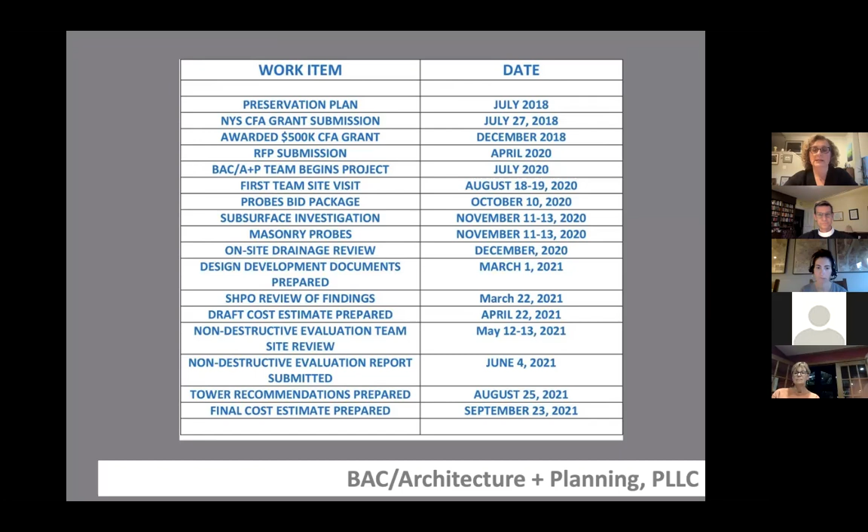Then we prepared our first cost estimate, and everybody took a deep breath. We did some additional evaluation called non-destructive evaluation in May. From May through now, we've been evaluating the findings of that last testing, and we revised the cost estimate. We just finished the revised cost estimate, and now we are just in time for this meeting, ready to make the recommendations on how to proceed with the project.

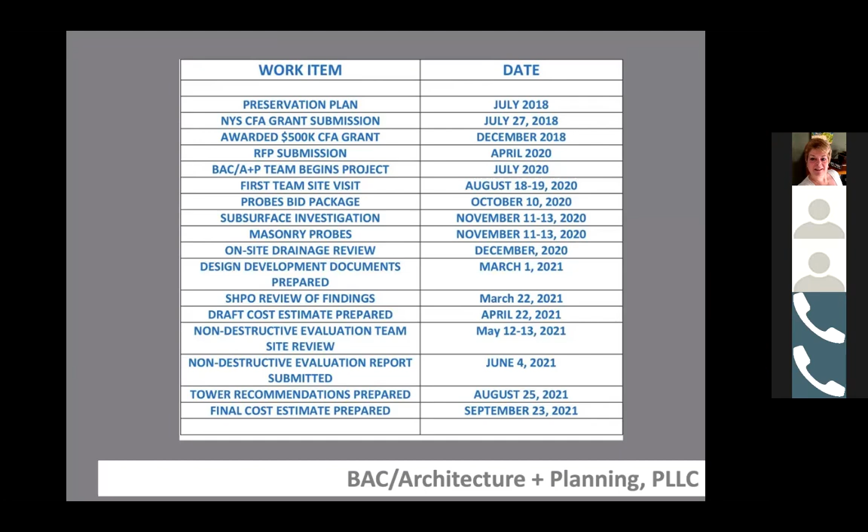So you might ask, why did you have to do this so many times? This was really sort of what I call a reconnaissance survey, where we walked around and looked at everything and identified what we could see without doing any additional testing or probes or opening things up, because at the time, the church did not have that sort of a budget. Our plan was to identify enough of the issues so we could prepare this plan and attach it to the grant application, and hopefully, and we got the grant for $500,000, we could then pursue the actual project and what needed to be done.

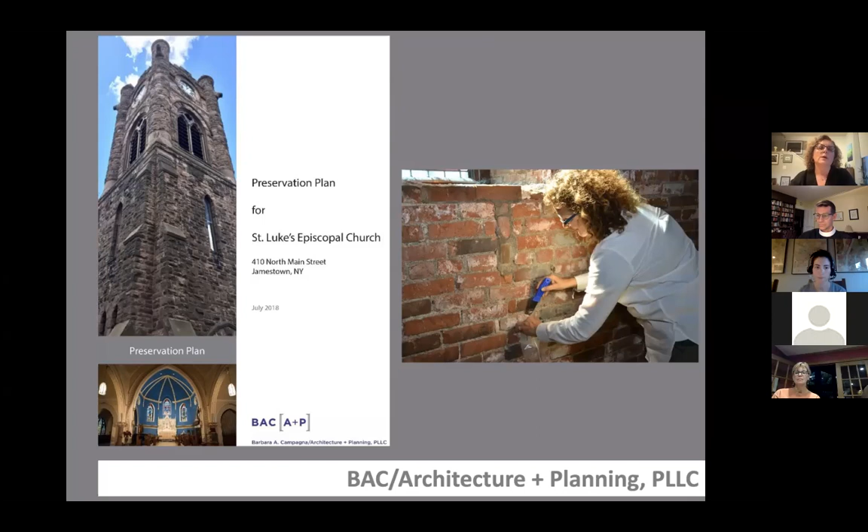A few things we were able to do: we took a variety of mortar samples, shown in this photo to the right. We sent mortar and some sandstone, the building is what's called Medina sandstone, and a couple of bricks to be tested, so we understood the composition of all the materials in the building.

So we got together in July and August. Here's most of our team in August. We came out, spent 2 very intense days comparing the church to the existing conditions drawings, marking them up. It's really important that our team gets to work together. For example, I'm the architect, and here's my associate architect. Here's Jenna, the structural engineer, and here's Helen, our conservator. And here's Joanne, who does our marketing and takes all of our photos for social media and helps with the business management. We spent all this time together, looking at the building from these different eyes and different views.

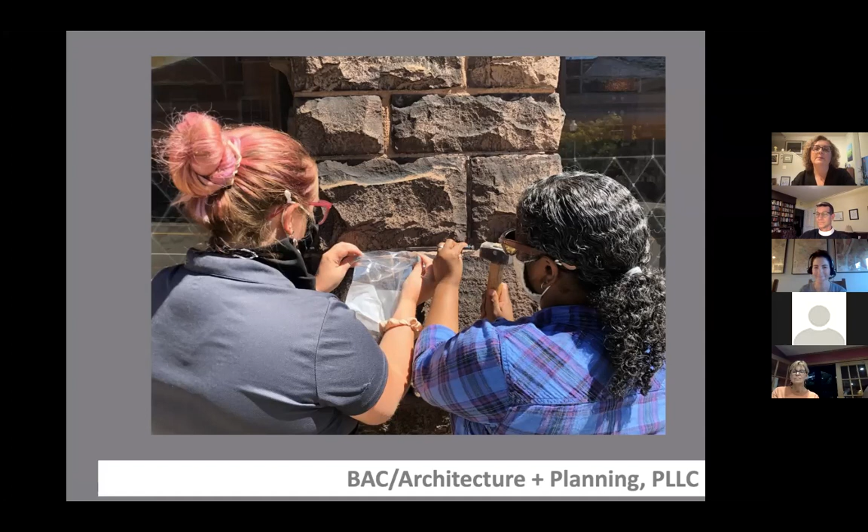Here's some additional samples we took for more intense conservation testing during that time. This is Justina and Helen taking some more samples. Mortar is very complicated because you have what's called a setting bed and a pointing bed, so it's often 2 different types of mortar within one line of mortar. So it's important to understand where's the original mortar. What's interesting about this building is there are probably about 7 different types of mortar that have been put on the building over the past 100 years.

So what we found in the preservation plan, what we observed, was that the front porch seemed to be pulling away from the building. If you've tried to walk up these stairs, you know there are issues getting up the stairs, that they've been pulling away. The ramp has a variety of issues.

Our observation in 2018 was that we needed to understand why the front porch was settling, and we needed a better understanding of why so much water was infiltrating throughout the bell tower.

So when we were together in August, we all decided we needed to pursue a subsurface investigation, meaning digging down below the church to understand what kind of soil it's on and whether there's any water underneath, because we didn't quite understand why it was sinking or settling, or if it was actually settling.

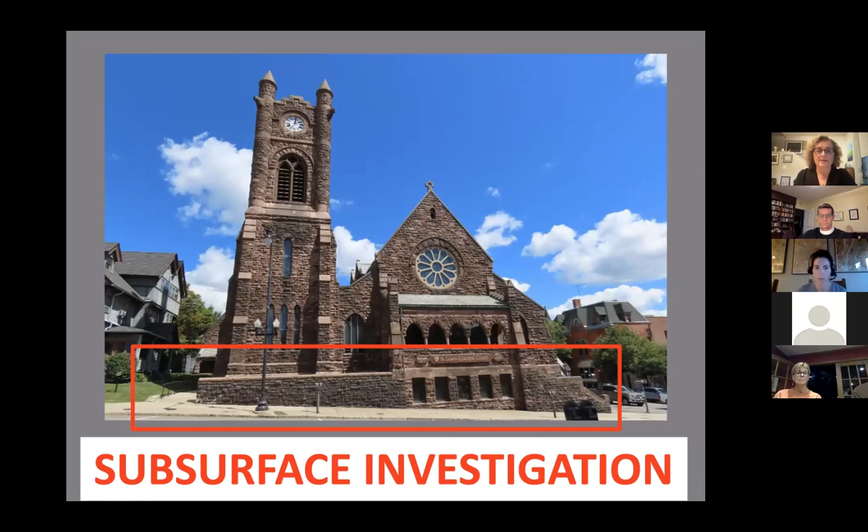Since this is a government project, we had to put this package out to bid, which added some time we weren't originally expecting. We had to hire a firm to come in to drill and do the subsurface investigation, and also to do some masonry probes for us.

Jenna, if you want to say anything about the subs—you know what, I'll just show these few photos and then I'll ask you to say a little bit about what the findings were, if you would like.

So we got these big machines out to do drilling, to drill down. We went about 50 feet in 3 different locations to confirm what kind of soil the church was sitting on. As you know, we're at the corner of two hills, so it's pretty complicated to understand how the building is actually put together, and how it has been sitting here, mostly in pretty good shape, for over 100 years.

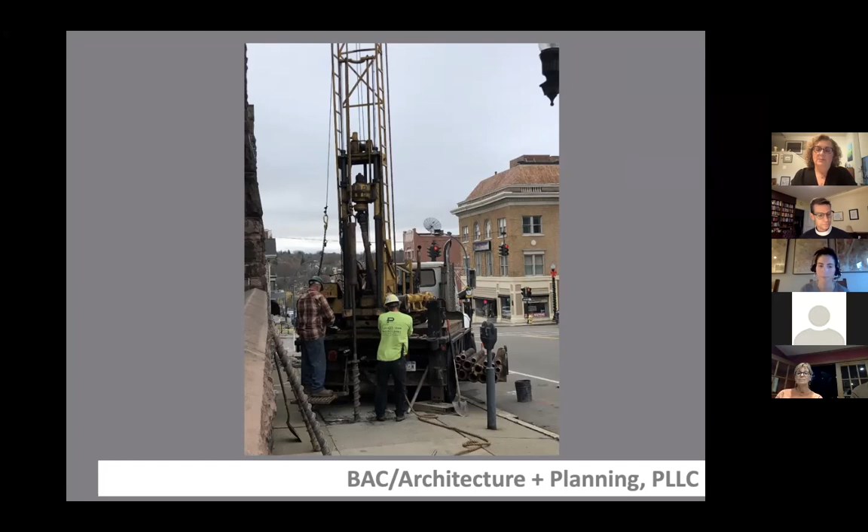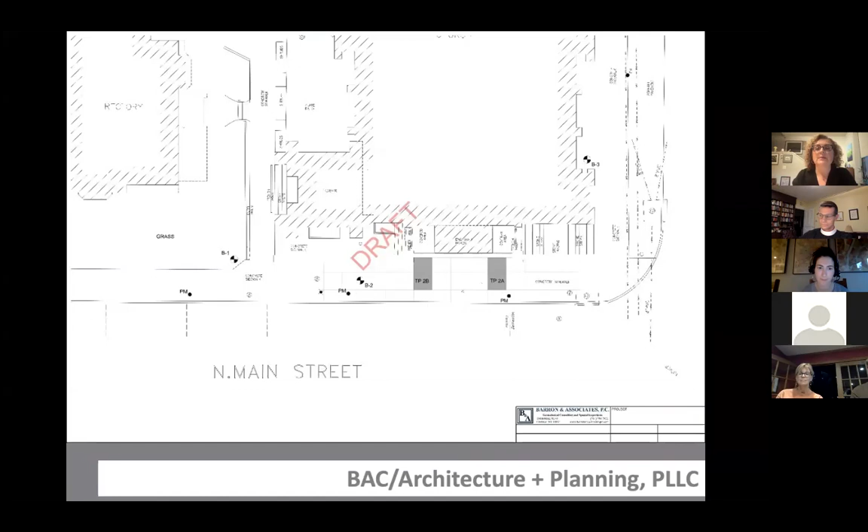So we drilled three different holes down about 50 feet and took soil samples. We also did test pits so we could take a close look at the foundation, see what's going on with it and what it's built of. Jenna's colleague Ed was here during this visit, got down into the test pit, and did all kinds of sketches. This shows what we found, what they took out when they did the drilling.

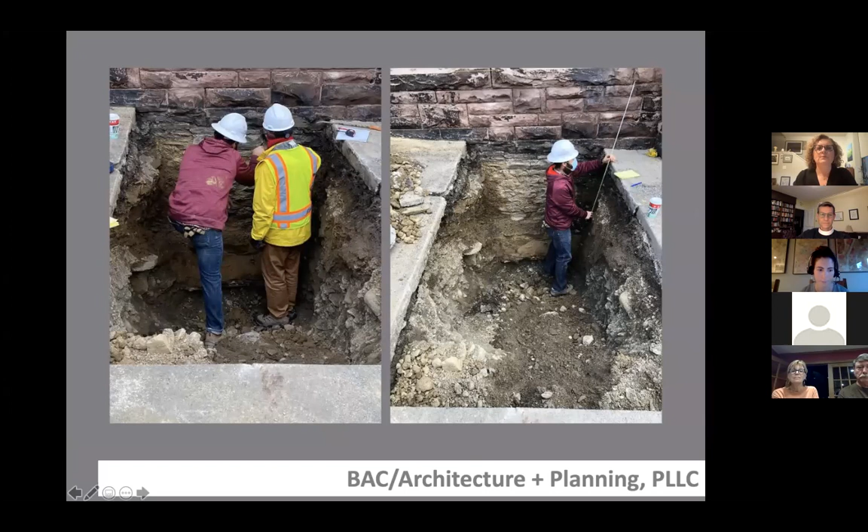And here's Ed and our geotechnical engineer evaluating the foundation. This is sort of MacGyvered.

The good thing about the subsurface investigation was that there was no water down there. We didn't know if there was a river or creek underneath here, but there was no water, which was a very good thing.

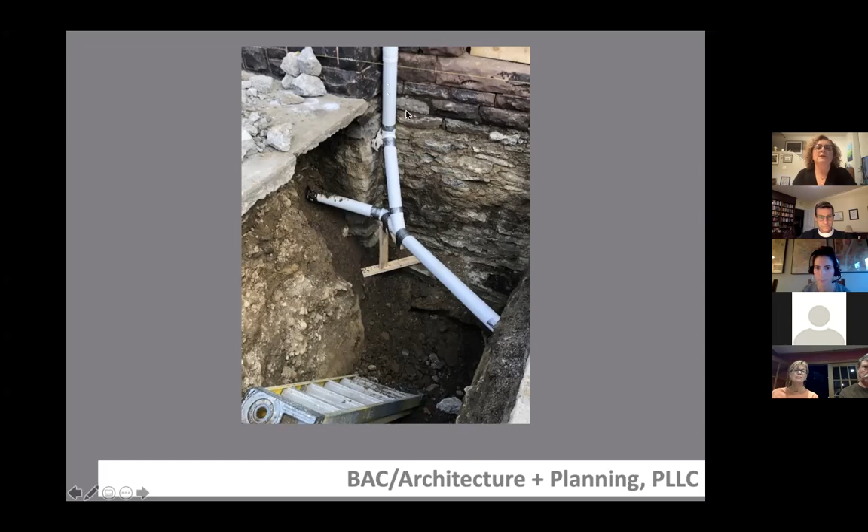The only water was because some drains coming off the building had broken, and our masonry contractor quickly pulled something together. It's not very pretty, so you can still see this white tube when you walk down the street. When we do the construction project next year, that will be changed.

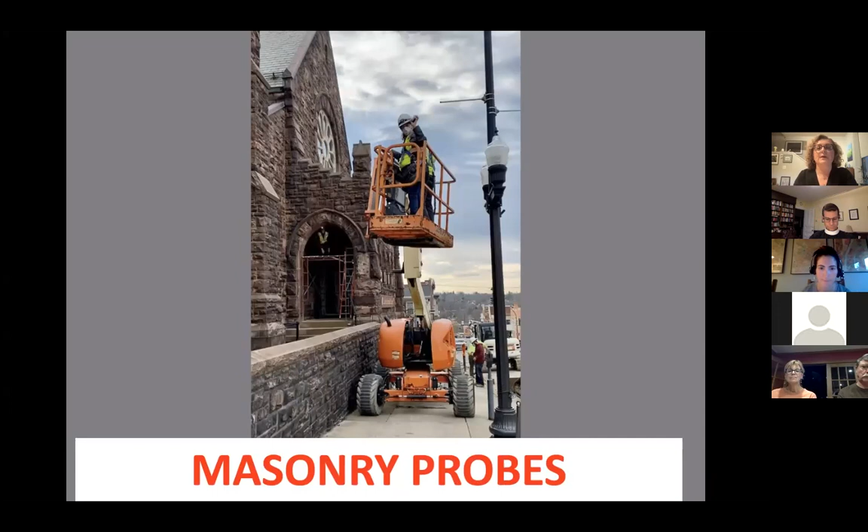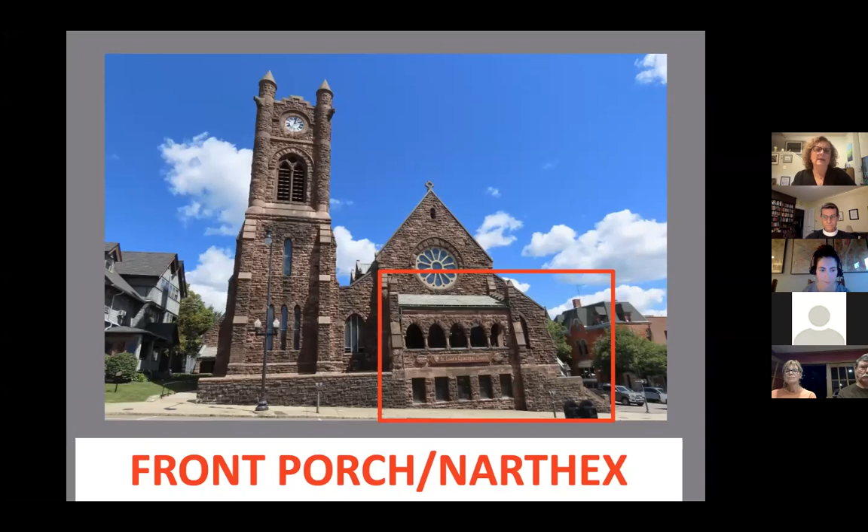We also did a variety of masonry probes to figure out what was going on with the front porch and the bell tower. As I mentioned, we thought the front porch was pulling away from the church. What Jenna actually found—I'll show a few photos, then ask Jenna to speak about this.

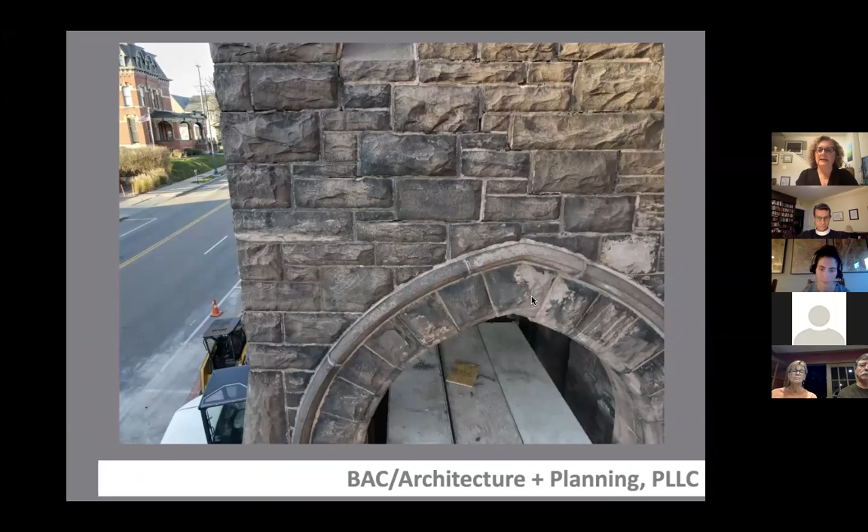You've probably all noticed the cracking at the entrance here, and this looks to be settling on either side of the main entrance off of Main Street.

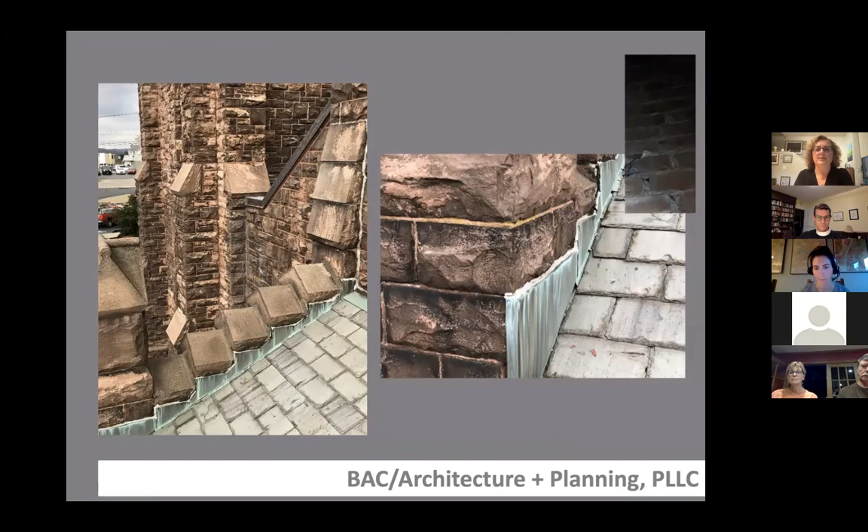We found a variety of cracks which suggested settlement. This is throughout the front porch entrance.

Yeah, so if you want to stop up here, I could jump in. Yep.

So as Barbara said, she retained us as part of the team after she did her initial due diligence to do an overall understanding of the building. Typically we as structural engineers are only called on a project to evaluate things that may be structural in nature or are inconclusive in terms of what could be affecting the building.

Typical things you would find with mass masonry construction that are structural in nature are vertical cracking and any displacement of the masonry elements, whether stone or brick. So we started looking at those specific items with Barbara and her team to understand how the building was designed to perform, how it was behaving, and whether the movement in the displacement of the stones, the cracking, and the shifting of that front stairwell system was anything that could potentially be an ongoing concern.

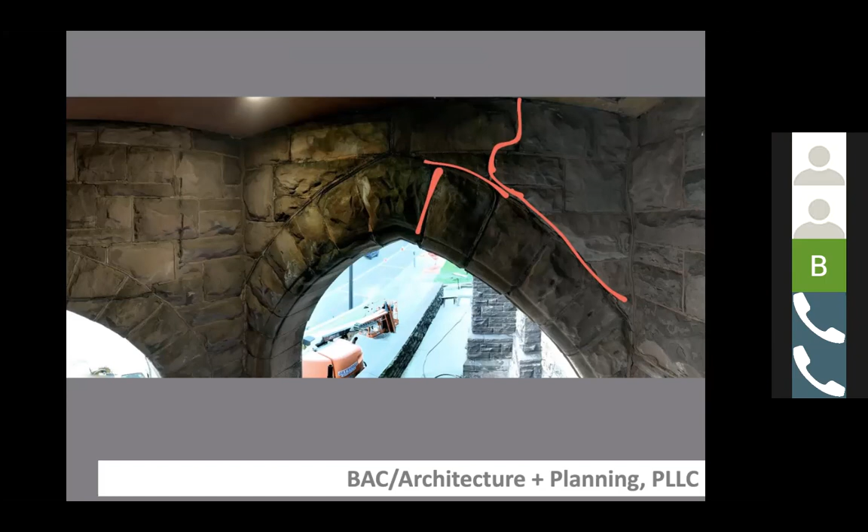Now, when we get this cracking and differential movement, that makes us want to understand if there's some sort of foundational concern, where part of the building is still settling and part is not. We want to identify whether that happened 100 years ago or if it's still happening now. That's why we felt the need to do all of this subsurface investigation.

We wanted to understand if the geology was consistent across the site, because in certain areas you could have really hard stone close to the underside of a building, and then, 100 feet away, it could be very soft clays. So there could be a shift in geology just underneath the building footprint, let alone in the city. We wanted to understand if part of the building was founded on something harder and part on something softer, which could continue to shift the building over time.

We also wanted to see the drainage situation and the presence of water underneath the foundations. Because even if the geology proves the building is founded on consistent, suitable soil, there could have been a system where underground utilities ran diagonally across the corner of the building, and a pipe burst could have washed away soil in that one specific location. That isolated incident could have caused a sudden shift in the support of the building. So we wanted to make sure the foundations, soils, and any drainage underneath the building were in good condition, so we could eliminate potential issues in foundation support.

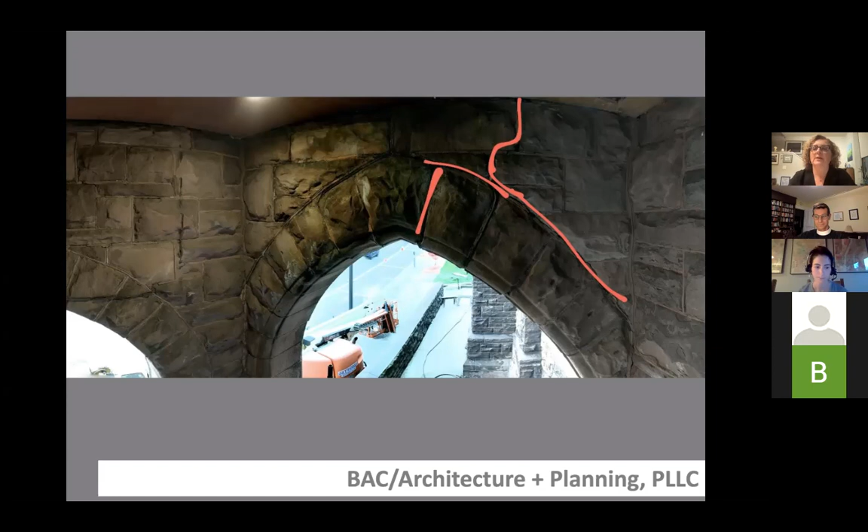So just to put the subsurface investigation to bed, our final report from Barron Associates determined geotechnically that the site is stable and there is no evidence of any geotechnical failures. So that was really, really good news. Our concern was if it was still settling, what we would have to do to stop the settlement could have been even more complex than what we're suggesting at this point.

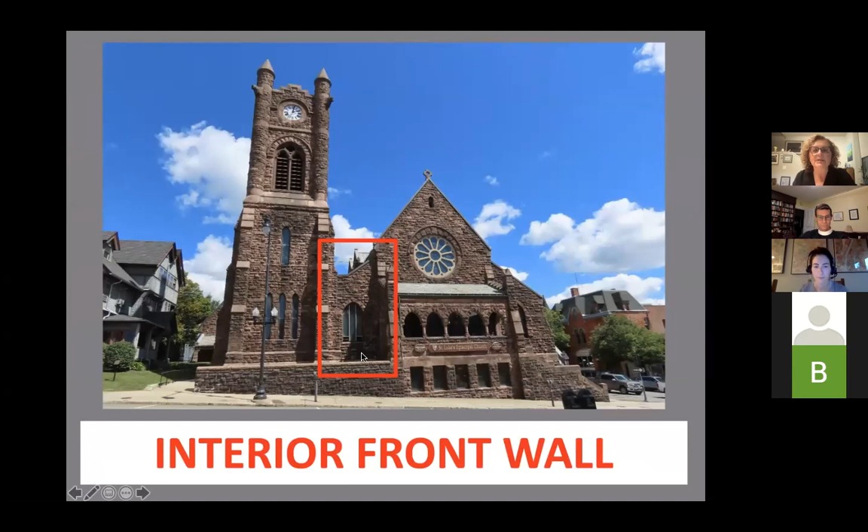So we looked at the probes. I mentioned there are a lot of issues in the front porch. There are issues with the parapet, the flashing, and the roofing. We looked at this area, a very funky little area where the bell tower meets the sacristy, with all kinds of water damage that's been going on for about 50 years at least that we know of.

So what we found here when we opened this up looks like kind of a mess, and it sort of is. There are several layers: Medina sandstone on the outside, then two layers of block material, and then two layers of brick. There's a lot of water damage. There's steel throughout that's also rusting, and there's wood that's also deteriorating.

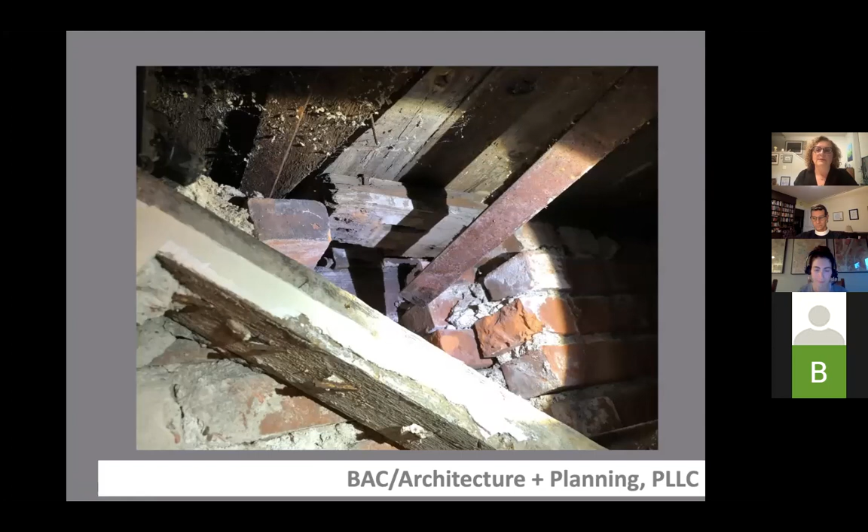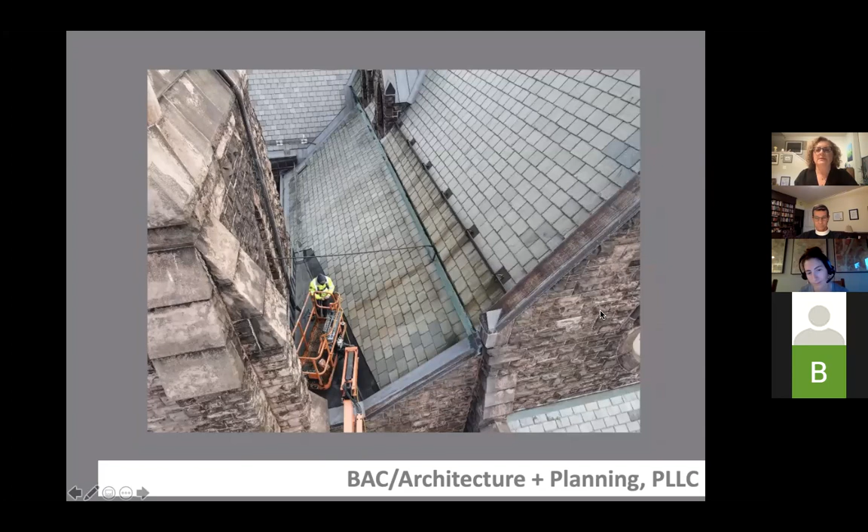So what's happening, in addition to some minor settlement, is cracking throughout this area and plaster damage, because water is getting in from everywhere. It's getting in from the front of the porch and at the bottom of the bell tower. If you go up here, this is where the plaster damage is, this is where the bell tower meets here. We've got water basically just running down the bell tower into the building, water coming down here into the building, and water all over here getting into the building.

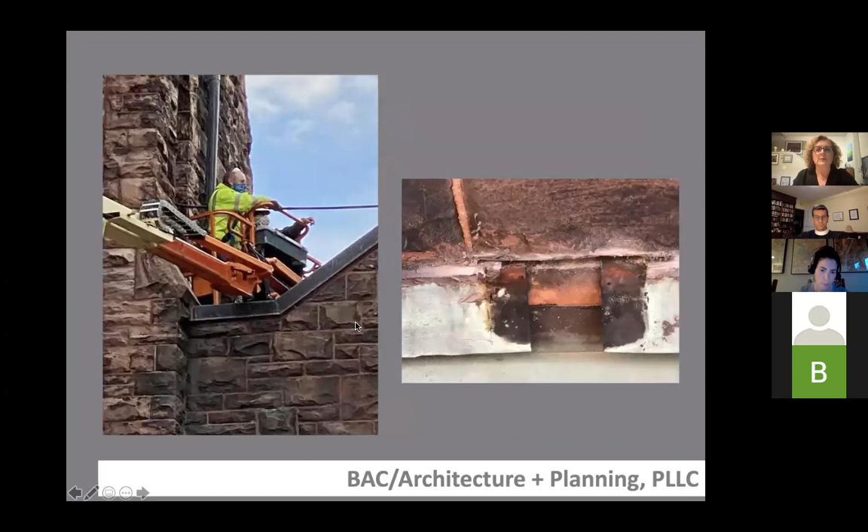This was done a few years ago, and this actual material is in good shape, but the actual details for the flashing, which were original to the building, such as this up here, should be relieving the water so that it comes down and goes out a drain, but instead the water is going inside the building.

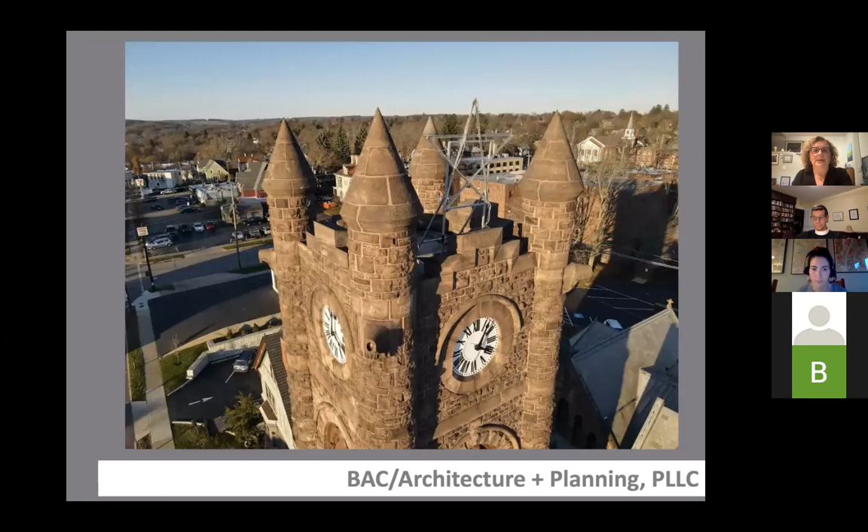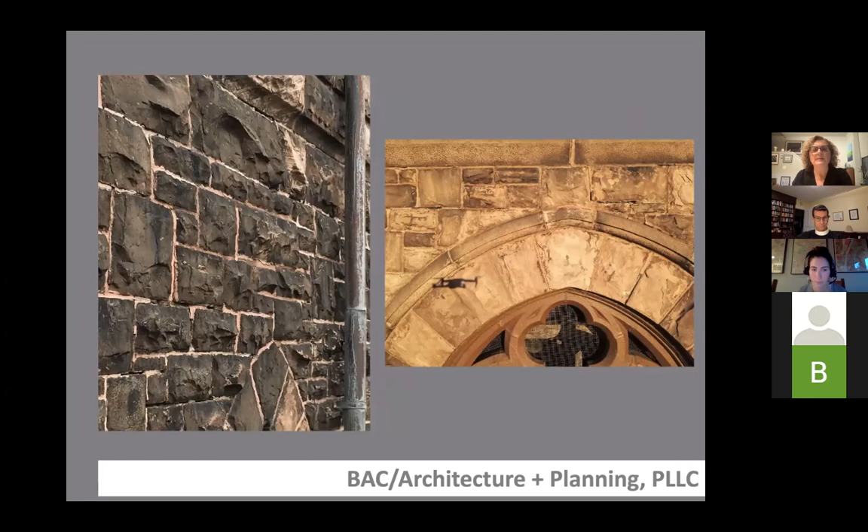So finally, we went to the bell tower and discovered a variety of things. We found all kinds of cracks and displacement on the walls of the bell tower, including, probably the worst part, the south wall. That's the wall we just looked at, right here, where the bell tower meets that funky little roof.

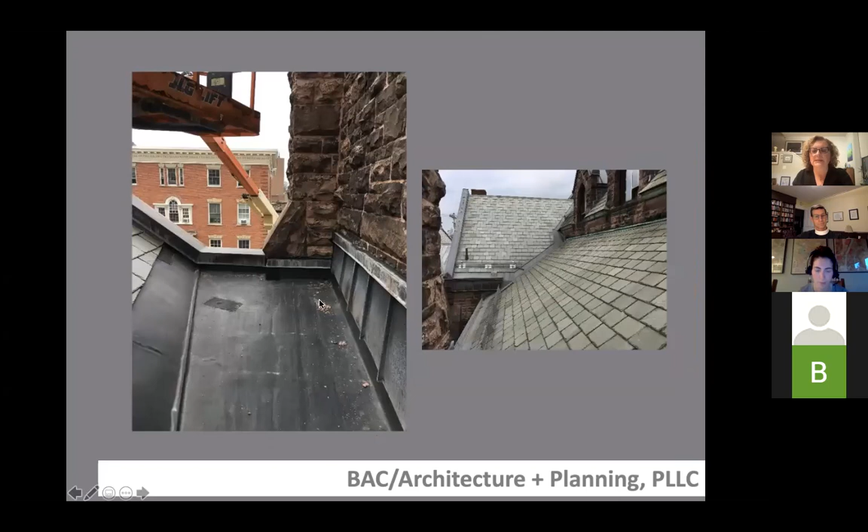We discovered that the roof is quite a mess, and a lot of this has to do with the original design. There's not a lot of room here for effective flashing. It puddles constantly. Water is just basically pouring from the roof through the walls down into the top two floors of the bell tower.

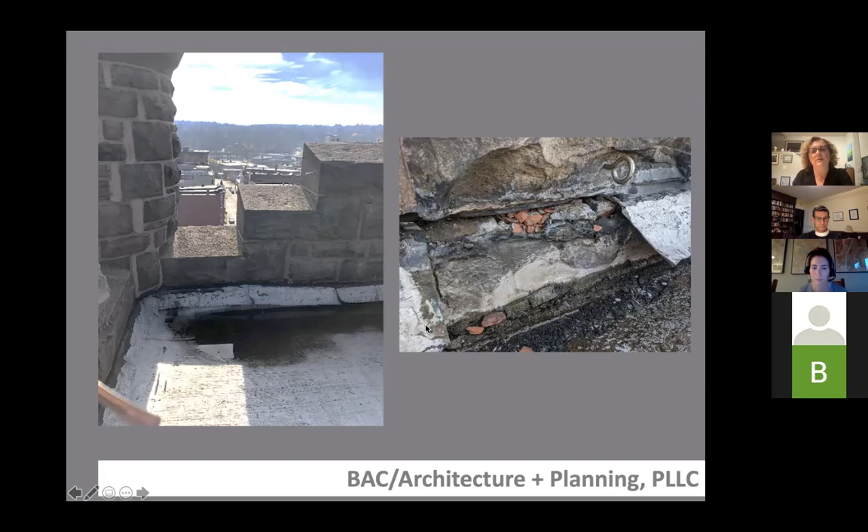Now, I always forget, Luke, which one of these was hit by lightning and was rebuilt? The one on the right, the northeast. Yes, okay, the northeast. So this was a few years ago, just when Luke started, lightning struck the building and this had to be rebuilt.

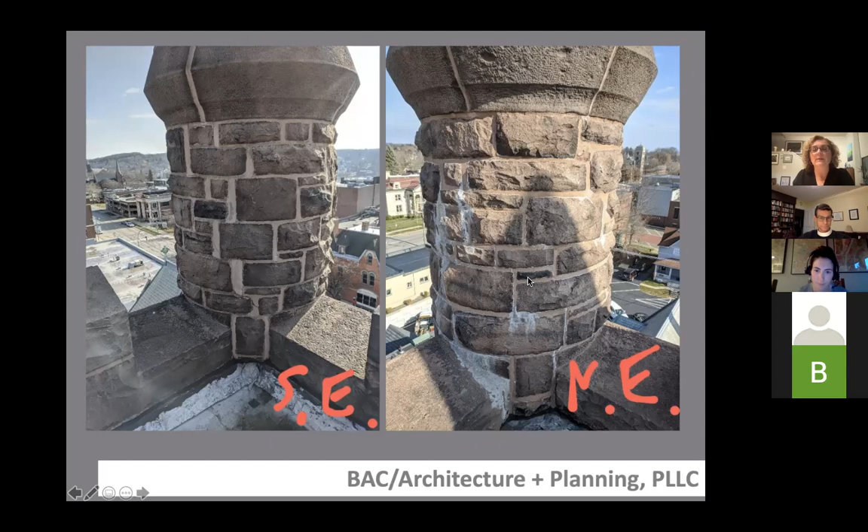But we started looking at all the turrets and noticed that there's a lot of cracking and settlement as well, including in the one that was redone a few years ago.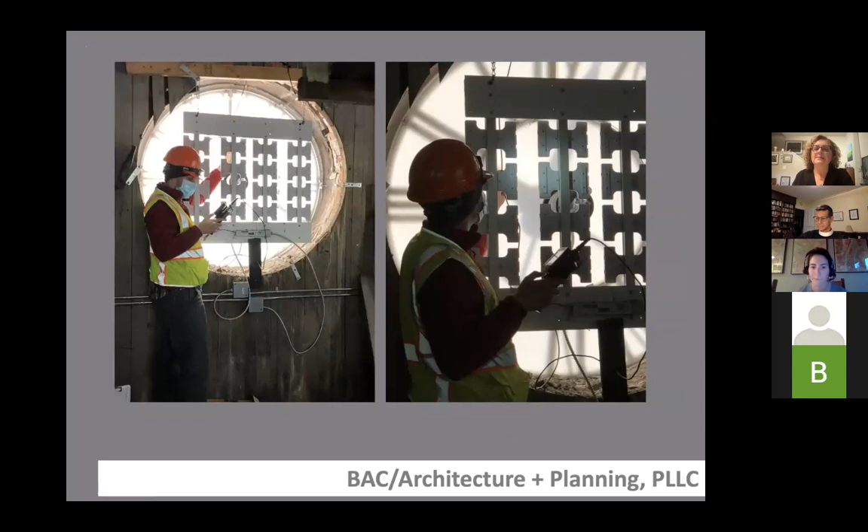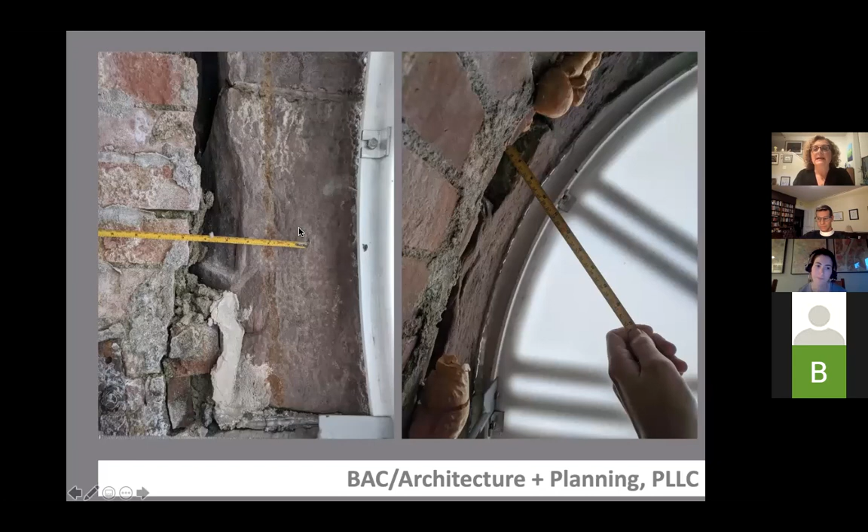Because we see this masonry on the outside, the sandstone, it looks like it's starting to pull apart. And that's indeed what we started to find, that throughout, where the masonry and the brick should be connected, either with anchors or mortar or grout, there were huge openings, some cases 2 inches, 3 inches, even 4 inches. And this is just what we could see visually.

We also had this concern about the drainage. We did the subsurface testing and realized that we were okay underneath here. This is checking the actual sewers. We did probes down into our drains as well to see if there was any blockage anywhere.

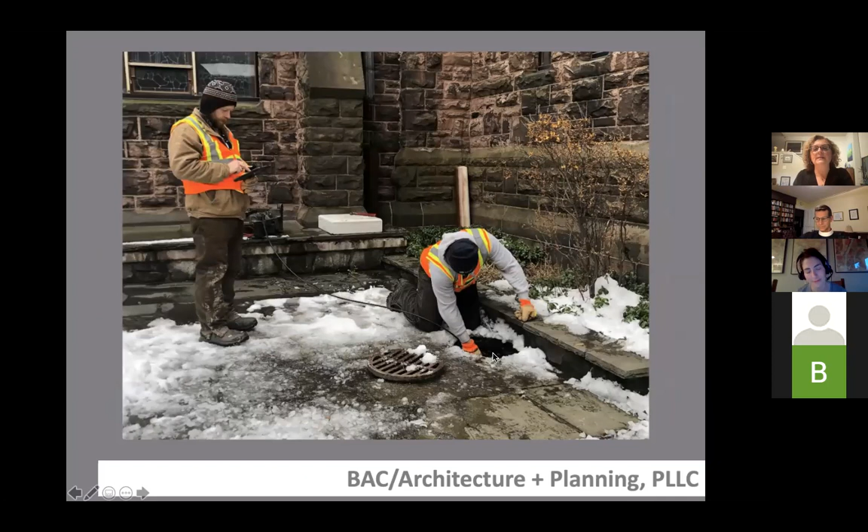There wasn't, so that was a good thing. So we took all of this information together, and at the beginning of 2021, we spent a lot of time talking and looking at this and doing sketches and trying to understand what was going on.

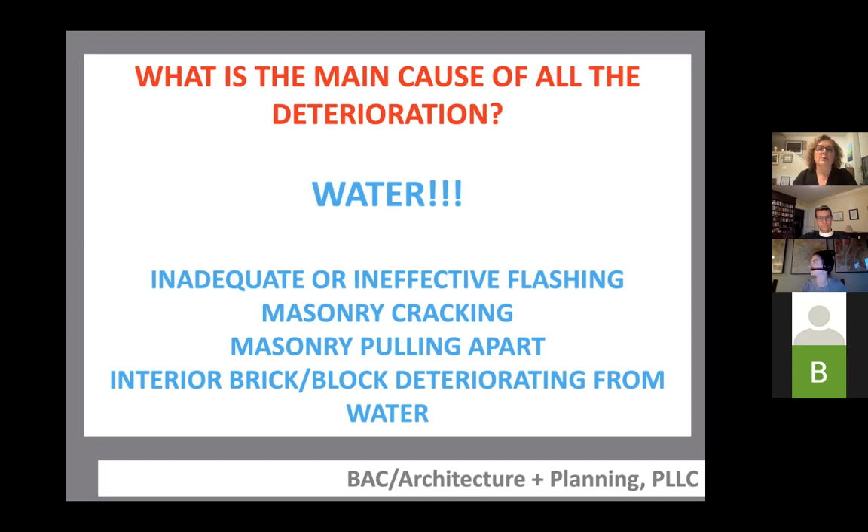So what is the main cause of all of this deterioration? The main cause is water. We've got inadequate or ineffective flashing throughout the building. A lot of it has to do with original design, and much of it is also inefficient maintenance afterwards. There's cracking of the masonry throughout, masonry settlement and pulling apart, and then interior brick walls and blocks, such as at the front porch, where you see that plaster deteriorating from water.

So with that understanding, we split the building into a few different areas. The bell tower here is called Area 3. We call this another area, the front porch, the stair, the ramp.

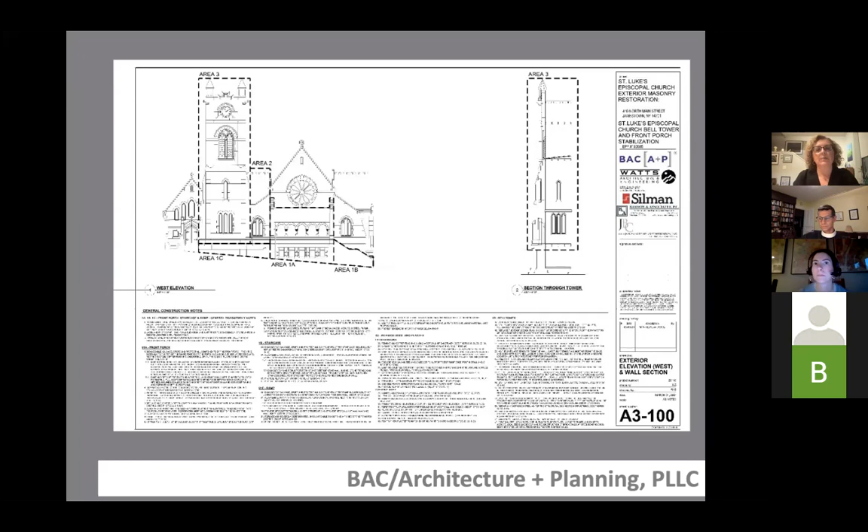And then we came up with all these different thoughts about what we needed to do and realized we still needed more information. So we met with the State Historic Preservation Office and presented this design development package, where we identified the main issues and what we needed to do next. They approved all of our findings and approved our recommendations.

And this brought us to the determination that we needed to do some additional testing on the bell tower. We were very concerned about the bell tower, and we decided to move forward with what's called non-destructive evaluation, or NDE.

The whole idea is that you're able to use types of equipment to look inside the walls without taking the walls apart. So we did a variety of techniques, including ground penetrating radar, ultrasonic pulse echo, and fiber optic video scope.

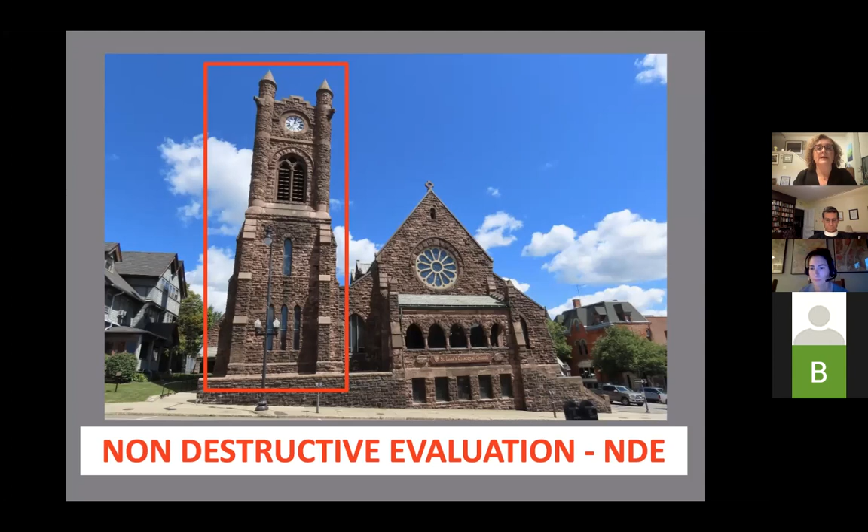I'm just going to show you a few slides of what this looked like. We did this in May, May 12th through the 14th. A team from ANA came, Silman's team came, my firm was there, and we all spent 3 very intense days together up on a 125-foot lift, looking at the interior and exterior of the bell tower.

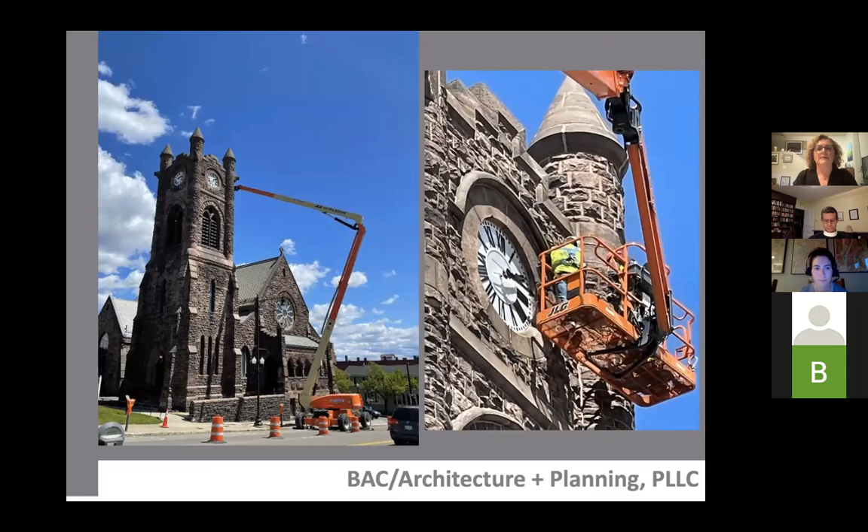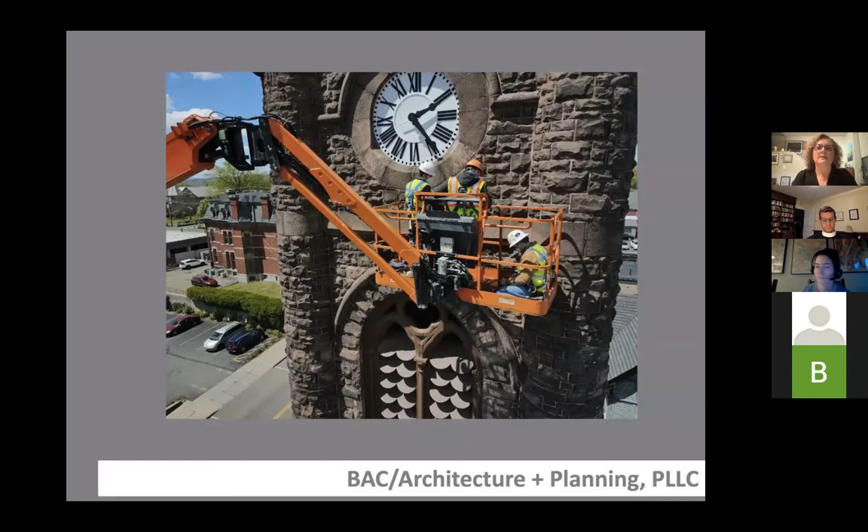We are very grateful that Luke bought a drone and is able to get these really terrific photos for us. These are the 2 engineers from ANA and the masonry contractor taking a look at and evaluating the stone on the south wall.

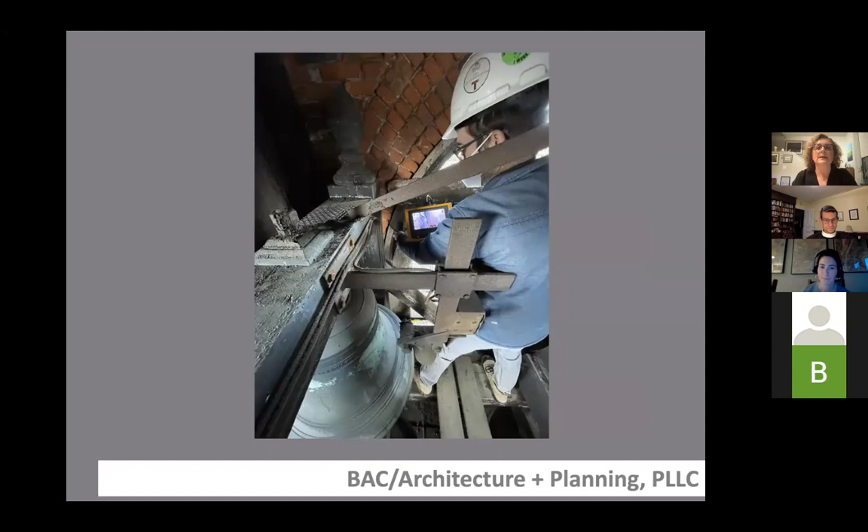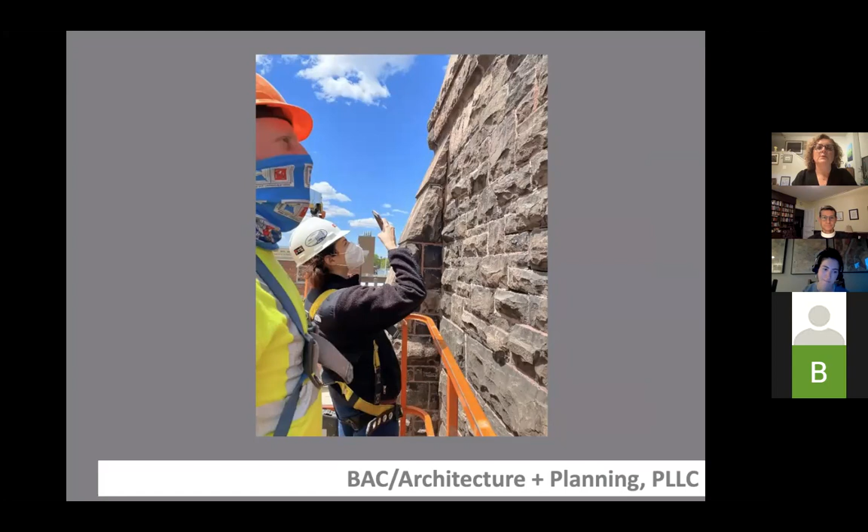This is one of the software packages. We stopped and took a look at what they were finding. This is the borescope on the interior, trying to understand what's going on with the brick backing of the masonry and the sandstone. Jenna and I went up together and looked at the top of the roof of the bell tower and the turrets.

So just some really interesting images to show what's going on. And Jenna, if you want to take over from here, I think there are about 5 slides I can go through. Yeah, and just to reiterate, we felt this level of study was needed because we had seen from the inside that there were voids.

We had seen from the outside that some stone had started to pull away from the building, and so, you know, when there are isolated voids, that's no big deal. You can repoint, remove stone here and there, reset it.

But our concern was that water has been getting into and through these building walls for over 100 years, to the point where we were concerned that these voids created an interconnected network, where essentially the worst case condition would be that your stone facade was no longer connected in any way to the backup brick. So you would essentially have a foot thick, or 16-inch thick, stone wall that's 80 feet high, or however tall, unsupported. And the thinness of that wall can only support itself so much.

So that then becomes a life safety concern for your parishioners and anybody passing by. That's why we felt that this part of the work needed to be front loaded and prioritized, and this study needed to be conducted.

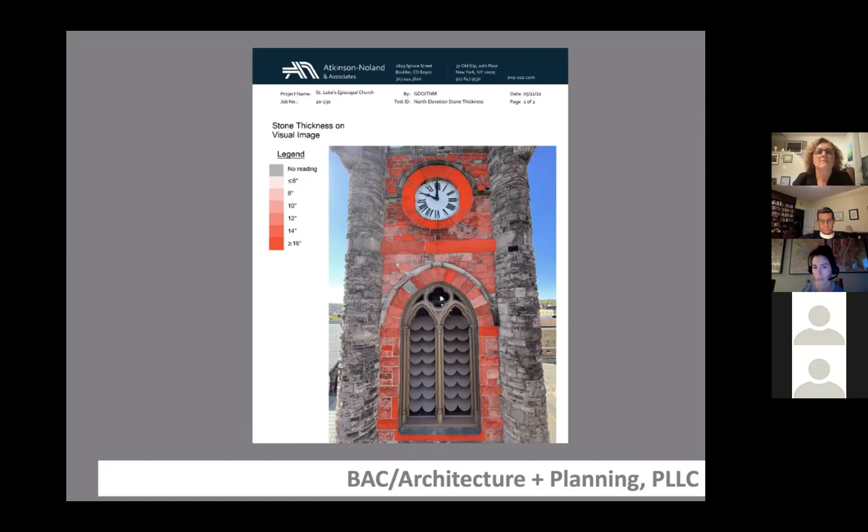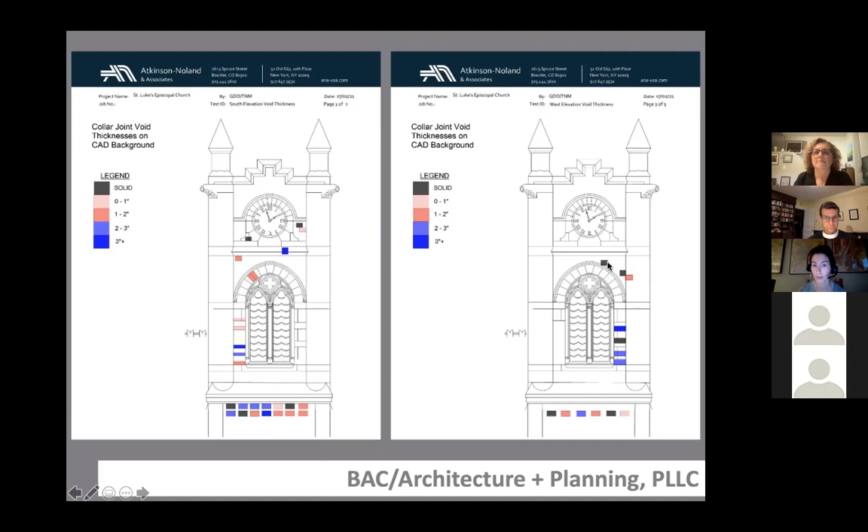These images show the voids in the collar joints, which is the vertical joint between the stone exterior and the brick wall interior, and we saw variability there. Some areas are completely solid, which is great news. But there are some areas where there's up to 3 inches of gap between the stone and the backup brick, a significant void. There's the potential that these networks are forming, and these gaps will only exacerbate over time if no work is done to the brick.

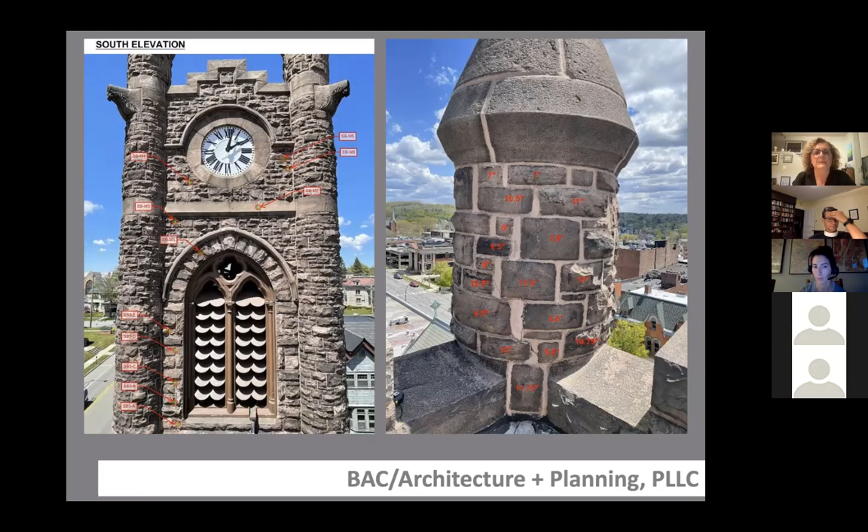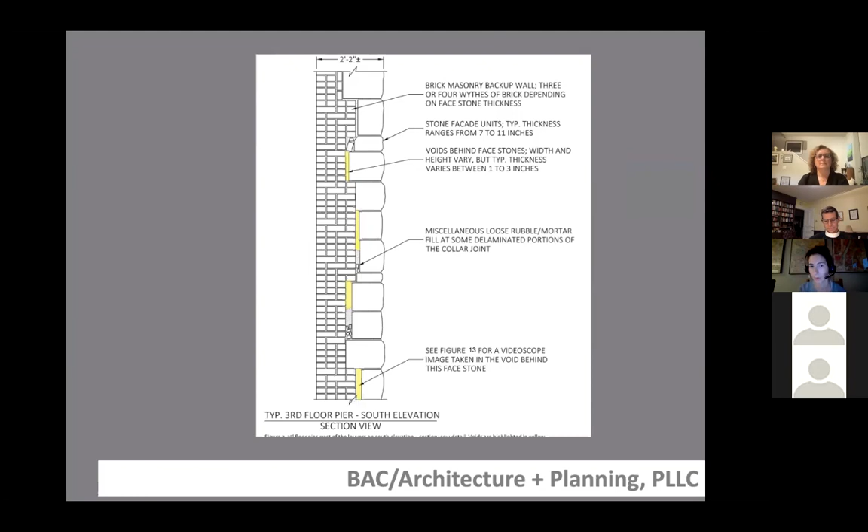When we received the report from ANA, we all had a meeting. I'll add that Catherine and Luke are in all of these meetings and are following everything that's going on as we are discovering them ourselves in real time. So we had a lot of discussions about what can we actually do? We don't want to take the entire bell tower apart and rebuild it. How can we actually do this?

Jenna and Ed and her team at Silman put together some schematic approaches to address the fact that in many places, specifically the top two floors of the bell tower, the sandstone on the exterior is pulling away from the brick. This is a potential life safety hazard. The issue is you never know the tipping point, what will cause a piece of stone or a piece of the wall to suddenly fall over, which you don't ever want to have.

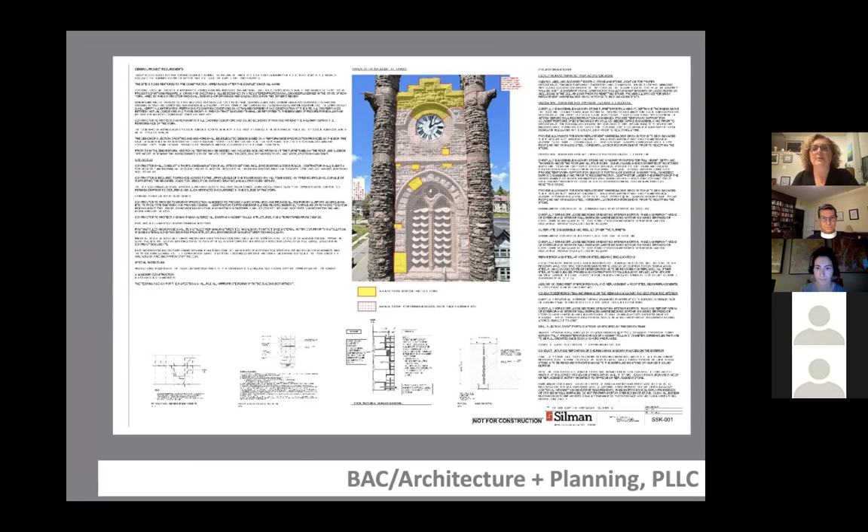So Jenna, I'll go to the next slide. Yeah, I can talk a little bit about this. The detailing shown in this schematic level drawing is an approach we've used very successfully in a wide variety of buildings of the same construction as the church tower. We're hoping that it minimizes costs in terms of level of reconstruction and actual removal and replacement of stone.

So what we're recommending is that the areas in yellow on the image are where we would physically disassemble and rebuild the stone. We have localized areas below the parapet where the stone has moved so much that in order to safely put it back, we think a mason should take it out, clean up the mortar, repatch it, and put it back.

At the parapet, we were thinking about what makes the most sense. We know we're going to have to work on the roof flashing and do something at the lower level of the parapet. We also know that the most significant separation between the stone and the brick is around the clock towers, so we think it's in the best interest to at least locally remove and reset the parapet down to the top part of the clock surrounds.

For the rest of the area, we think the approach should be mechanical stainless steel helical ties installed from the inside. They go through the full thickness of the brick and anchor to the back side of the stone. We do that at a regular enough pattern that you don't have to do it with every single stone—just in a grid-like pattern so you're grabbing a good amount of stone. The rest of the stone around it gets repointed, and everything is adhered to one another, both mechanically with the anchors and through the repointing campaign around them.

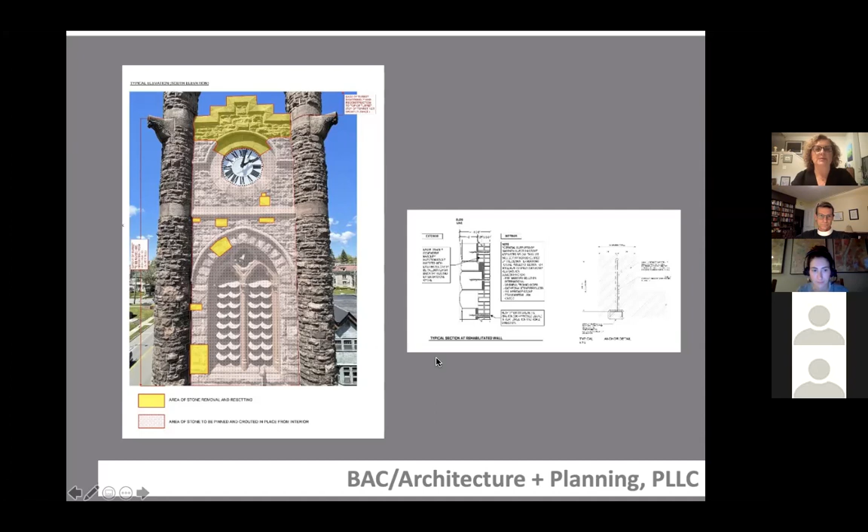So with all of that, we've been working with the cost estimator and the whole team, going back and forth, identifying what we can do with the money we currently have, and what is the best way to phase the project. And we have to factor in that it's not just toilet paper and bottled water that you can't get.

The construction industry has been hit very hard by the pandemic and the supply chain, or lack thereof. It takes months to get simple things like wood, lumber, steel, curtain wall. Pretty much every project I have under construction right now is backed up by seven months plus, just because it takes so long to get everything and you're not sure when it's going to arrive.

So we had to take all of that into account. How do you address the fact that you don't know when stuff can arrive? We also have a very complicated building roofline, so how we design and how we work with contractors to develop the scaffolding is also going to be very complicated.

So the overall cost, if we were to do all of the work on the building's exterior right now—which includes what we're calling Phase 1A and B, all of the bell tower, and then the rest of the work: front porch, staircase, ramp, other roofing, which probably could also be in Phase 1—plus all of the interior plaster work, is about $2 million if we were able to do all of the work right now. But we know we can't do all of the work right now.

We have enough funding right now through the $500,000 grant, through another grant from the Landmarks Conservancy in New York City, and through the fundraising campaign that Luke and the vestry have done, to do Phase 1A—which is what we spent most of the time showing you, the top two floors of the bell tower, because that is our immediate life safety issue. That is just about $900,000.

What would we like to do? We'd all like to do this all at once because it's much more efficient—it's much cheaper to do everything at once. If we have to break everything up into separate phases, each time we have to prepare a separate set of bid documents, and each time we have to go out to bid.

You pray that you get the same contractor. I worked on a project a few years ago, one of the Newport mansions, where they had done one wall with one contractor and another wall with another contractor, and everything was different. And we had to redo everything again. So there are all these big issues.

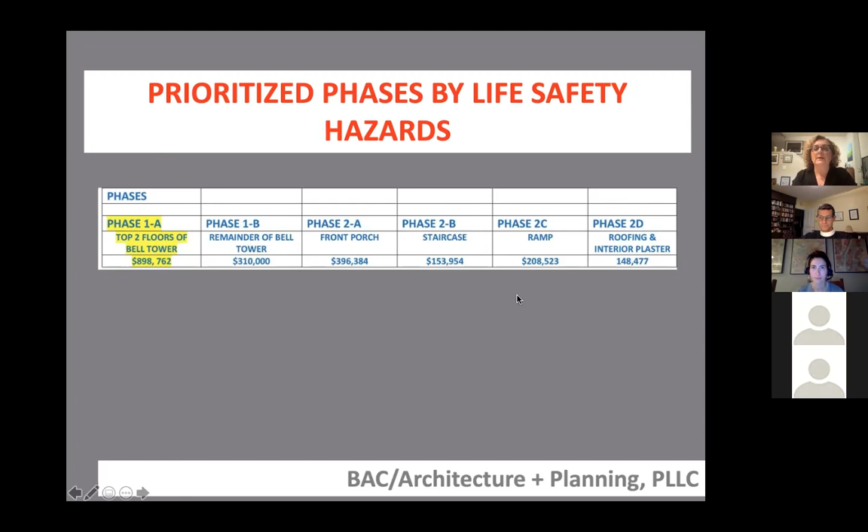Right now, our fee includes design documents for one phase. So then you have to pay the design team for preparation of bid documents and working with the state to get through all of that. I didn't total it because it depends when we do it all. If we did it all right now, it would be about $2 million. But if we have to break it into separate phases, each phase will add a little bit more money for the design team costs, for the scaffolding, and who knows what will be happening with the supply chain in the coming years.

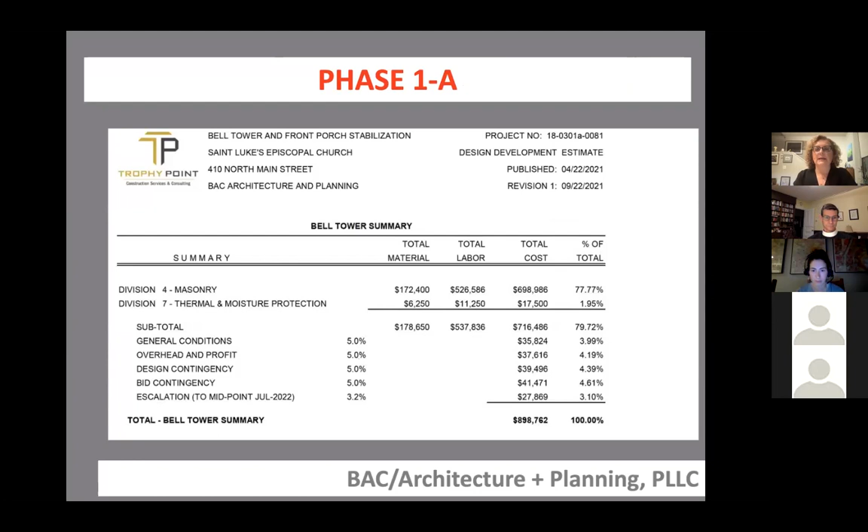So we're really focusing on this phase 1A, the 2 top stories of the bell tower, because of the significance and the life safety hazards — about $900,000, we hope. The supply chain is really impacting all the construction projects.

If we paid anywhere from $20,000 to $50,000 to do all the repairs here in phase 1A, by the time we get back to the final phase, we would probably have to do it again. You want to do the exterior work and all the roofing first, then let the building dry for a year before you actually do the interior work.

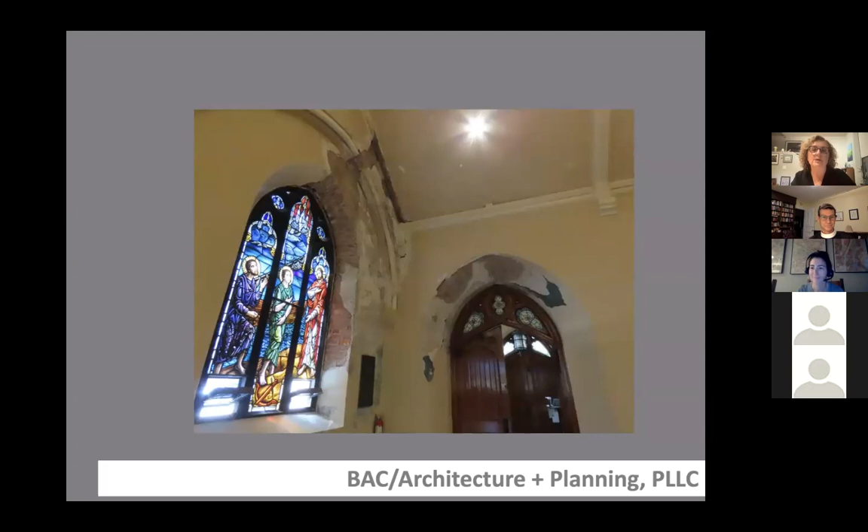So what are the next steps? After today's meeting, we'll be setting up a meeting with the State Historic Preservation Office folks so we can take them through this presentation and the cost estimate. And then we as a team will prepare the construction documents specifically for this phase of work, unless in the next couple of months we suddenly find the money.

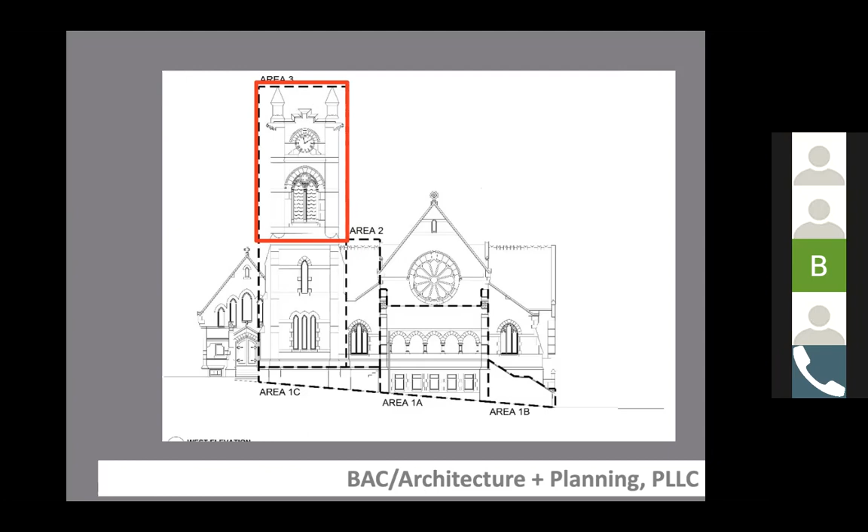I mean, we would love to do the whole bell tower at once if we could — that would be a little bit over $1 million. So somewhere between now and the beginning of 2022, we'll be putting this package out to bid for contractors, with the intent of starting construction in the spring.

And there you have it. That's our summary of the many issues that are going on. Just to correct one thing about the price points.

We actually don't have the full $900,000. We have to come up with a little bit more — we have more like 700. So we're still about 200K short for the first phase. But I believe God is good and we'll figure out a way to get there, even if we have to find other resources. We do have an endowment, not that we want to touch it, but sometimes when you have life safety issues, as someone in the vestry pointed out, if a stone falls and kills someone, you have no endowment. So there are ways in which we have to do this, but we'd have 700 committed to the project. We have to find the other 200.

And I will add, the reason it took so long to justify and revise the cost estimate was we were trying to get the phase 1A work, the life safety hazard work, down to that 700,000. And we just, at this point, could not see getting it below the 900,000.

So any questions? I have a question to ask, if I might.

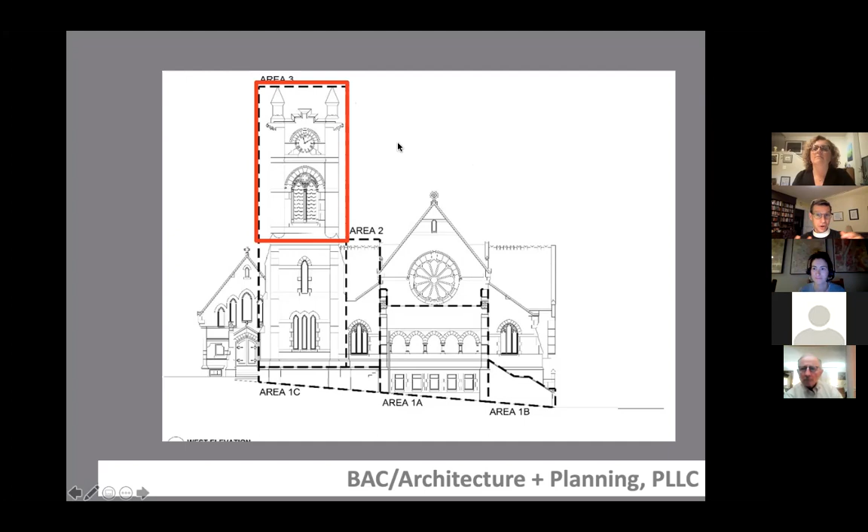Does that answer your question, Gordon? It does. My only other question would be, did the lightning strike contribute to any of the other problems we're finding with the bell tower?

No. The rest of the building's damage is really coming from water and from the original construction. One of the big issues is the roof and the flashing throughout, and a lot of the issues are from the original design, which we see a lot. They did amazing things 100 years ago, but there are often errors, which you can see.

Was it the design? Was it the architect? Was it the contractor? It was probably a combination. We find that after 100 years, but hey, this building was built in 1894. It's still standing. We want to make sure it continues to stand.

So I think we've reached the point where we really need to make some of these repairs to make sure that we don't lose your endowment because a piece of one of these blocks falls.

There's a question in the chat about whether the damage is accelerating each year. Is the rate of damage accelerating? Yes, I mean, it's hard to put a percentage on what the acceleration is. And that's one of the complications with construction, as you know, from the horrible collapse we saw in Miami earlier this year. Everything is fine until it isn't.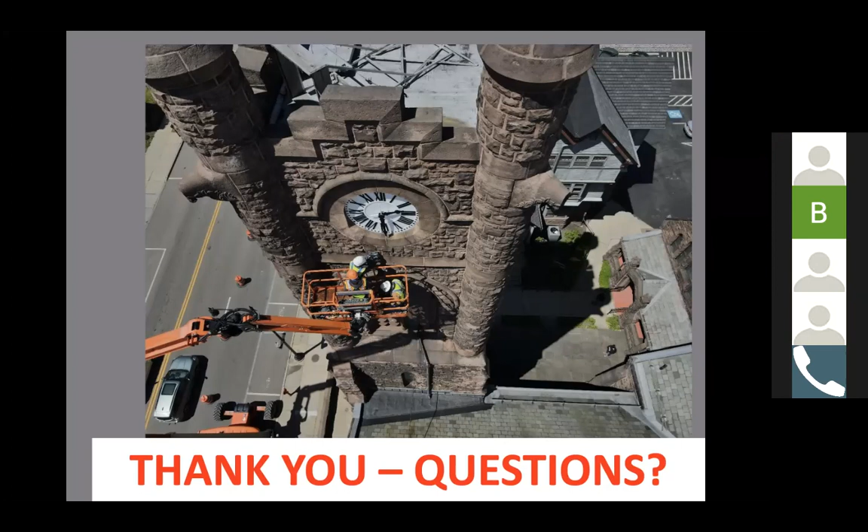We have a better idea since we were able to do all of this evaluation and the non-destructive testing, so we can see. We were able to get up there and see that there aren't any stones that look like they're going to fall right this minute. That's something very positive, being able to get up there with these lifts and touch them. There's nothing like being able to touch these stones and the turrets.

Jenna and I, even though we could see all the photos from the drone, made sure that we had time to go up and look at these stones ourselves, because if we're making a recommendation that we have to rebuild all of this, we have to be pretty darn sure that's the right thing to do.

And there are other things that need to be done at the church too. We probably need to reevaluate the whole drainage system at some point, and every one of the walls around the church and inside the little courtyard need to be repointed. That was all identified in the original plan, but they're not life safety hazards.

The hope is, as we do these projects—the bell tower, for example, the front porch—it becomes very clear the appropriate way to do the repointing, and then hopefully we can do a little bit more each year on each of the other walls as well.

Linda asked in the comments, how are you redesigning the flashings? That's what we're not quite sure about yet.

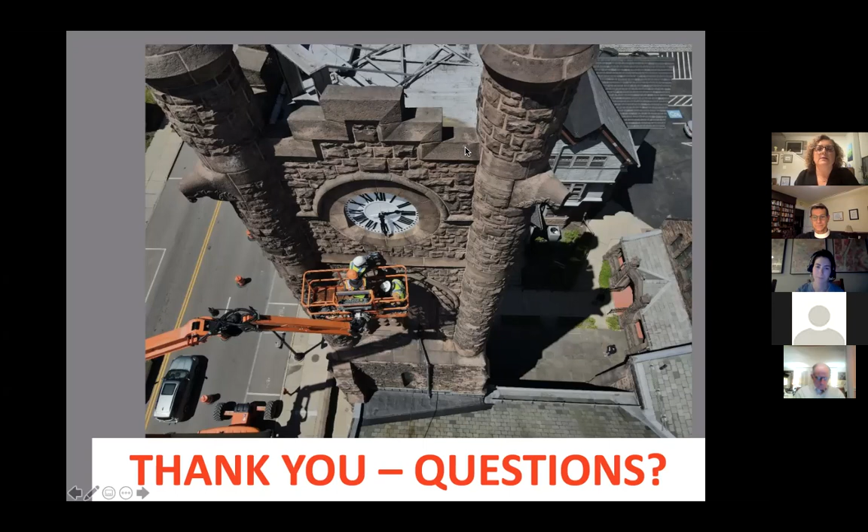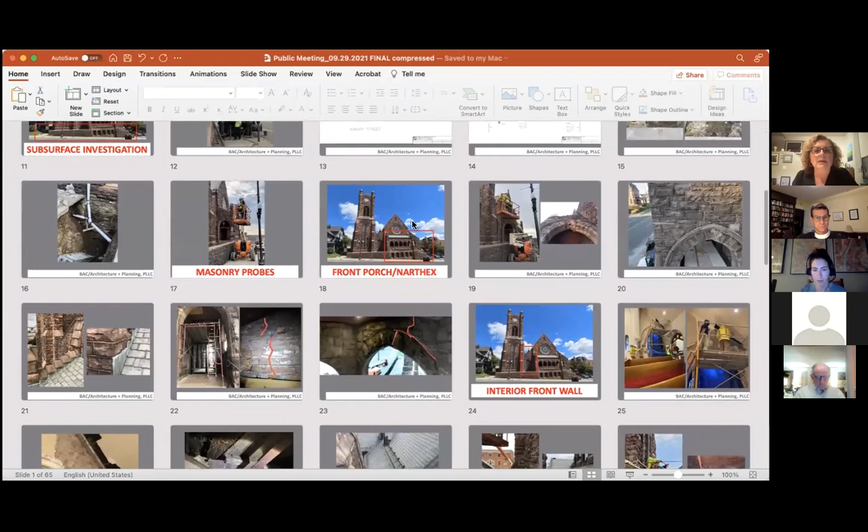Part of the issue, if we look at the bell tower here, the original design is really funky. The flashing should be much higher, it should be up around here. But because of the way there's this crenellation, they put it down here, which is really kind of useless.

Since it appears we are going to be rebuilding all of this, we will probably rebuild the back of the walls so we can put flashing up higher. It's called through wall flashing, because the flashing should go almost all the way through. Sometimes it does go all the way through, because water in the masonry hits the flashing and gets brought out to the roof and to the drains. That's not happening here or over the porch. So we basically need to take these blocks apart and redesign the flashing. Jenna and Ed, her colleague, and I have done a variety of pretty complicated masonry rebuilds like this with parapets and flashing.

There's a question Chris asked about city district heat. Was it installed at the church, and did it impact the porch area? The answer is no, it hasn't been installed here, and so it has not impacted the porch area.

Any other questions? I have a question.

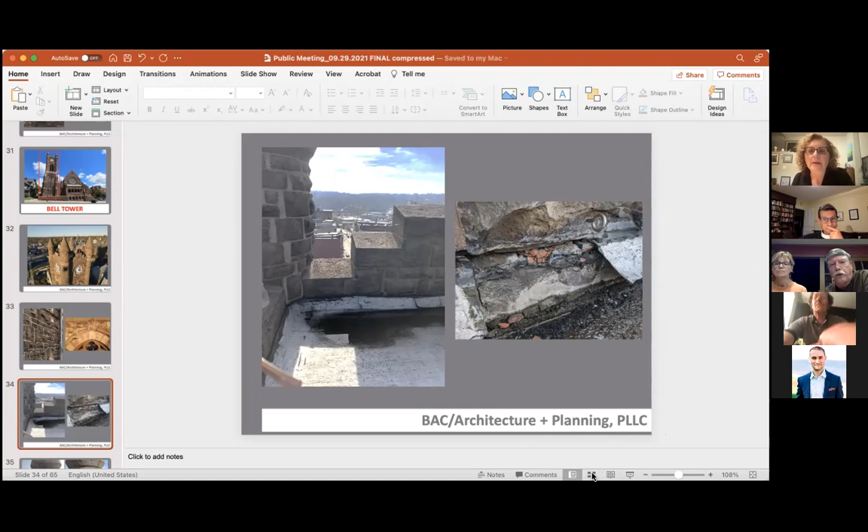Water, it rains, and there's only one drain that comes down the side of the building here, comes out here. The water just gets in everywhere, and it's been causing all the damage to the mortar, accelerating the separation of the brick backup wall from the Medina sandstone.

What is the roof itself composed of? Oh, it's just an asphalt roof, nothing fancy. Steel framed with sheathing, I believe. There's a corner of the building that's really wet where the steel is fully corroded and has actually fallen. I think that's this corner.